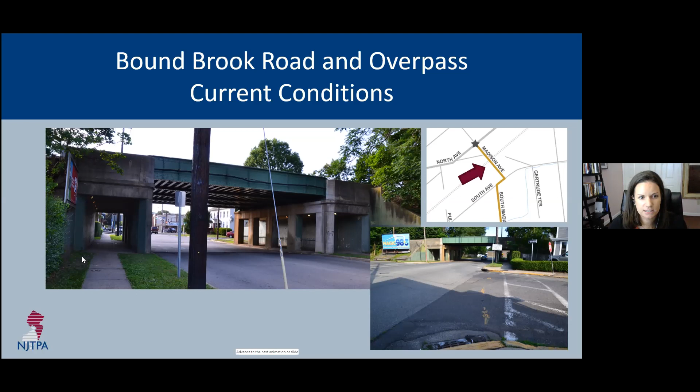We have a few ideas that were discussed during the presentation, which included maybe putting a mural in the intersection to help stop cars from blocking the crosswalks there.

Does anyone have any feedback on what they think could work in the overpass or in that intersection there? Maybe some mural ideas or anything you think about these recommendations?

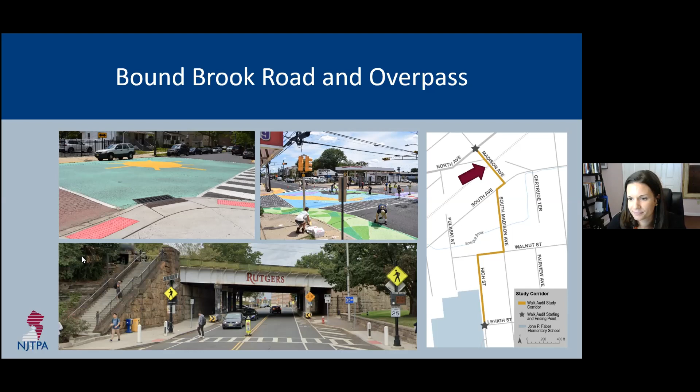I do agree with that. Yeah, absolutely - I wonder if the costs associated with that have changed, because they're doing it in more locations now. I wonder how these townships are able to afford it, because $36,000 is a significant amount of money. Is it $36,000 a year, or $36,000 for the life of the paint? Do you know how long it'll last? I was informed it was a year when we discussed it with Transit, but that was about 5 years ago. Of course, we can always revisit it to see what the costs are today.

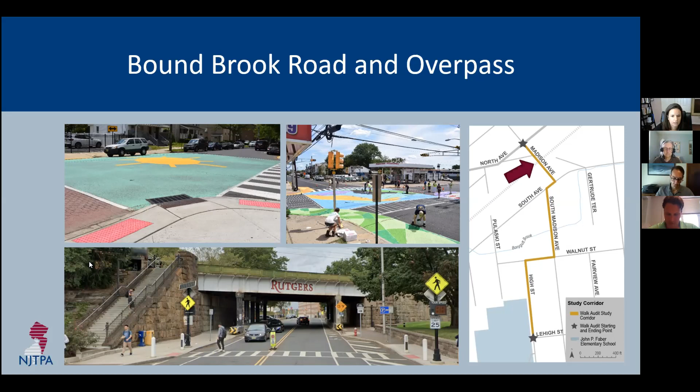So do we have any questions?

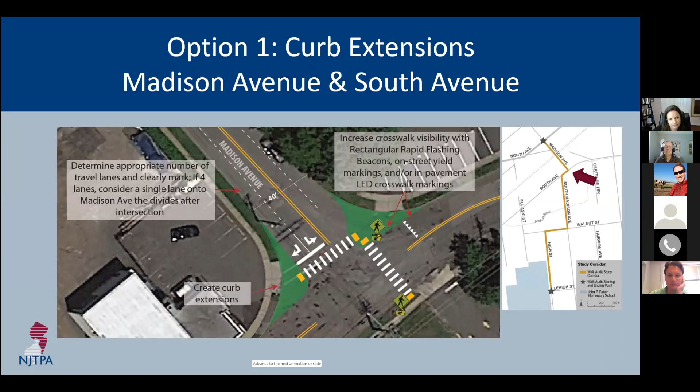This is James - I just wanted to point out that on the previous slide Lisa was talking about, the other intersection had that same treatment. Oh, this one - yeah, so she's proposing the same style of curb extensions there to make the crossing safer for pedestrians.

Now we have another option for this intersection, which would include a bicycle lane, a two-way bicycle path. I noticed when I was walking through Dunellen that there were a lot of people on bikes riding on every street - I saw at least 1 or 2 kids, some families. It was nice to see, but I don't know if that's a COVID type of scenario or what.

There is this option to install a two-way bicycle lane here because it's a pretty wide roadway. I don't know if there's any preference for one design versus the other, but with the two-way bicycle lane, you wouldn't be able to have the curb extension across South Avenue. Do we have any thoughts on one design versus the other?

How far up would the bike lane go? Our study corridor only looked to South or to Madison Avenue, but if there's a broader bicycle network plan for Dunellen, you could bring it all the way through down South Avenue further. We would also have the bicycle lanes on South Madison, and you can have them pretty much all the way down to the elementary school.

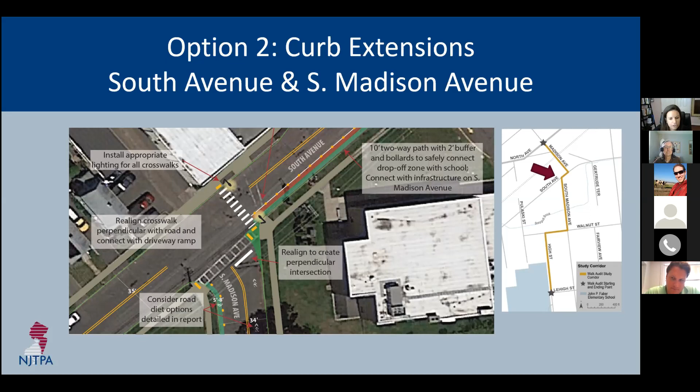I can show a quick layout of what the road would look like with the bicycle lane. You would have the two directions of traffic on one side with the buffer between the traffic and the bikers, and then 11 feet of travel lane on either side, which is a decent width for a travel lane through a residential area. But we also know with the bike lanes, just by having that, they'll slow traffic down - it's like a modified road diet.

Wonderful, I agree, I like the idea of bike lanes. Dunellen actually just applied for a grant through the NJDOT for bike lanes. I don't know specifically in this area, it was more or less sharrows, but that's something we can examine for future projects.

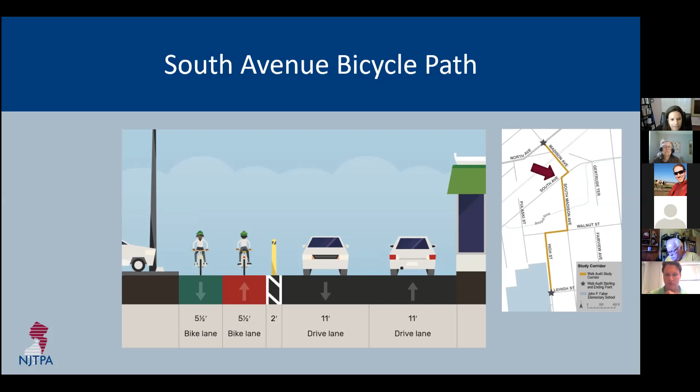Okay excellent, and if we just want to look at the full intersection, this is what it would look like if the bike lane went the whole way. It sounds like the bike lanes are popular.

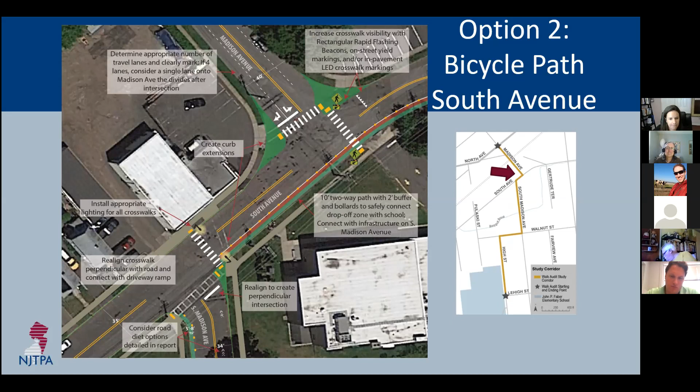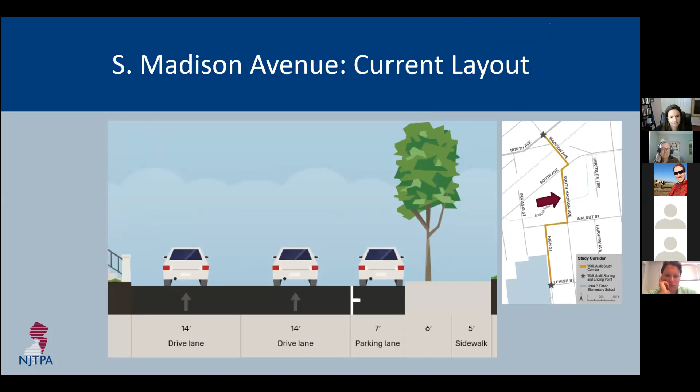So we're suggesting that there's not quite enough room for a two-way bike lane, but you could have a mixed use on-street sidewalk or bike lane, and then narrow the traffic lanes down to about 10 feet each. Do we have any thoughts on this? You could also have a sharrow on the one side of the road where there isn't a bicycle lane.

Oh Tremaine, we can't hear you. Does anyone else, while Tremaine gets set up? Can you hear me now? Yes, yes, sorry about that.

That's okay. And would that take away from parking on Madison on one side of the street there? So there's no parking on the one side of the street as it is, I guess because the fire station is there, so this doesn't remove any parking here.

Oh, so this would be in front of the fire station side of South Madison. Well, the bicycle lane would be on the opposite side of the fire station, so the fire station would be on the side where there is parking, and I guess so the fire trucks can get out, they don't have parking on the other side. Oh sorry, there we go. Does that make sense?

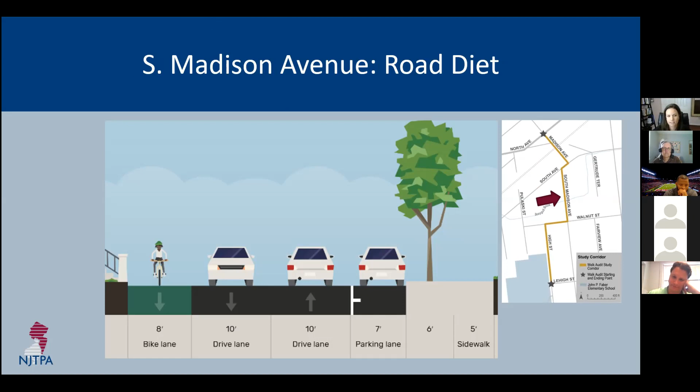Okay, so if we don't have any other comments on this intersection or roadway, we'll move on to— oh sorry, we had one more comment. Oh yes, that many parents don't let their kids walk to school because of the lack of safe space. This is one way to address it.

Okay, so now the intersection of South Madison Avenue and Walnut. Again, we have the on-street sidewalk, bicycle lane, and then the sharrows on the other side of the street, as well as striping for no parking. It has to be 50 feet of no parking from the stop bars, and then 25 feet on the one area where we mentioned there was an issue with trucks parking and blocking the intersection.

I think this intersection may also need something more than just the stop signs in the roadway, such as rapid flashing beacons. Something more to give traffic more visual cues that there are pedestrians here, especially since it's so close to the school.

I know during the walk audit we talked a little bit about maybe a raised crosswalk, which raised crosswalks are usually for a mid-block crossing, not at an intersection. But in Princeton they do have a whole intersection raised, but that's probably a pretty substantial cost. And the rapid flashing beacon, you can even have flashing lights within the crosswalk itself, just different visual cues. And if we wanted to install a 4-way stop sign instead of just a 2-way, it would require a traffic study.

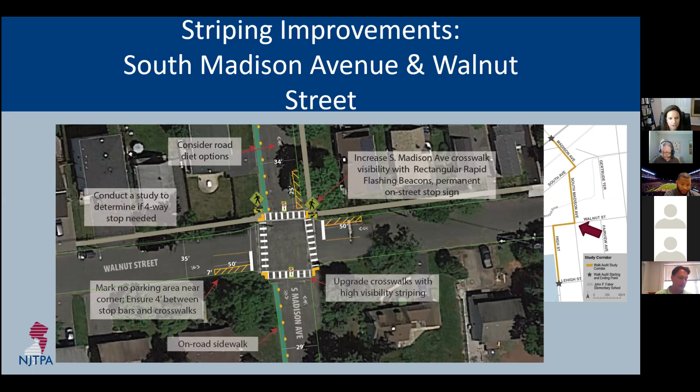All right, so let's move on to High Street. Currently High Street has 2 different layouts. In the northern section, you have parking on both sides and a very large single-direction travel lane that's 16 feet wide, and sidewalks just on one side of the roadway that are only about 4 feet wide, which isn't compliant—the minimum is 5 feet in order to be ADA compliant.

Then when you move a little further south, you have on-street parking that's parallel on the left, about a 12-foot travel lane, and angled parking on the right with a bit of a wider sidewalk.

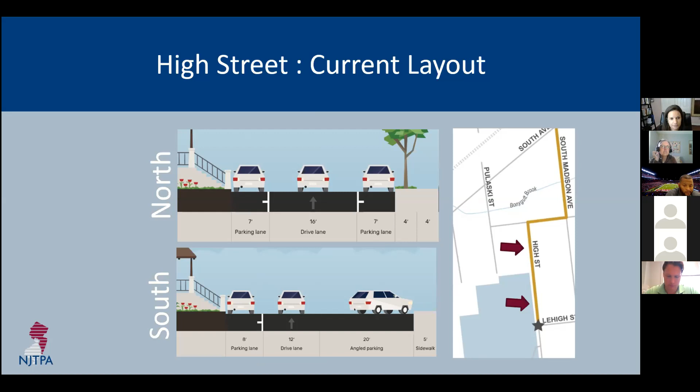We're suggesting for the northern section of the roadway to keep the parking on one side and minimize it to a 10-foot travel lane, and then have a bi-directional multi-use path. You can paint it right onto the street, have bollards separating it from the travel lanes, and then you have this large, basically sidewalk area that you can paint to specifically show which direction you should be traveling in.

That area is almost right in front of the school, so it just gives a lot more opportunities to walkers and bikers who are headed into that school area. So this is just for the northern section of the roadway.

But then when you go a little bit further south, where you have that angled parking, you can continue this path as well and have parallel parking on either side of the road rather than angled parking. The problem with the angled parking that a lot of people mentioned was the backing up at the end of the day, which is a pretty dangerous situation for kids.

So if we have this bike lane or multi-use lane, more kids would walk and bike to school, and then you wouldn't need so much parking at the school, hopefully. So what do you think about the multi-use path, which would get rid of about half of the angled parking spaces?

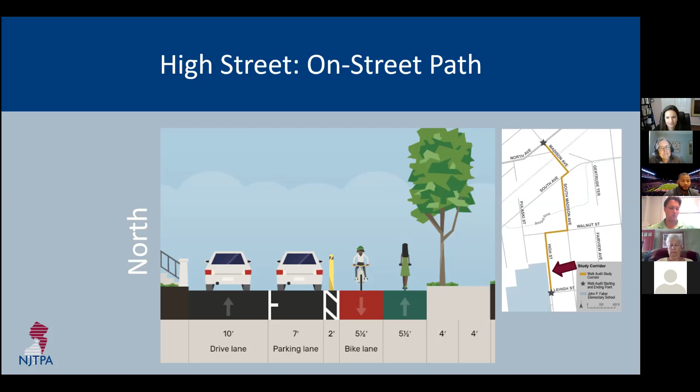Okay, so Anne, do you want to take over the next steps? Yes, thank you everyone for joining us again today. Next steps: I'll be sending out an email, and we've set up a little questionnaire where you can submit your comments about today's presentation. The email will have links, and we're giving you a week to do that. You can also share this presentation with others who weren't able to join us today. There were definitely people on the first workshop, and I'll be sending this to everyone who wasn't able to join us today. Then we'll pull this all together into one of those draft reports like you saw at the beginning of the presentation that Lisa shared, and we'll circulate that to the Dunellen Complete Streets team and get their comments on the draft report sometime towards the end of September.

So any other questions or comments before we log off today? We really appreciate you coming on and staying with us today. I just wanted to say thanks for all the suggestions. There's a lot to think about, and I'm really excited about it. So thank you to you guys. Thank you all for participating and for giving us your great feedback.